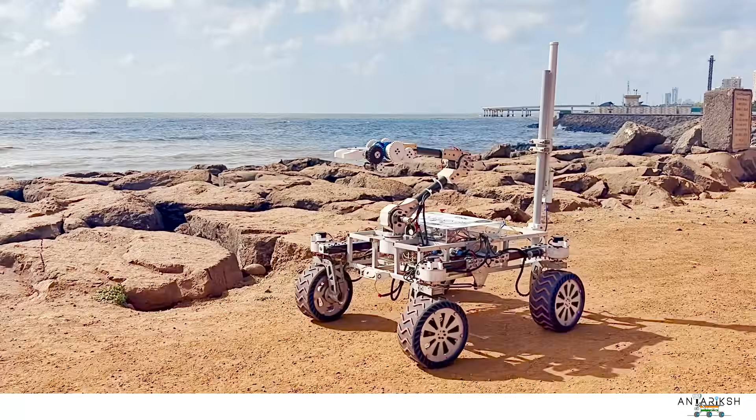Hello, I'm Dantani, the captain of team DJS Antariksh, the official Martian rover team of Dwarkadas J. Sanghvi College of Engineering, Mumbai, India. This year, we are thrilled to participate in the European Rover Challenge 2026 with our rover Avyaan. Our team was founded in 2019 with the motto to decipher unimaginable. Today, we bring together 60 passionate students across 5 key departments: mechanical, electronics, coding, science, and marketing and management.

Our team follows a vertical hierarchical structure wherein the team captain provides strategic direction, guiding the team towards its goal. The vice captains and the team managers support coordination by managing timelines and overseeing administrative processes. The integrations head manages inventory and facilitates interdepartmental coordination. Each department is led by the department heads whose expertise in the domain ensures subsystem development.

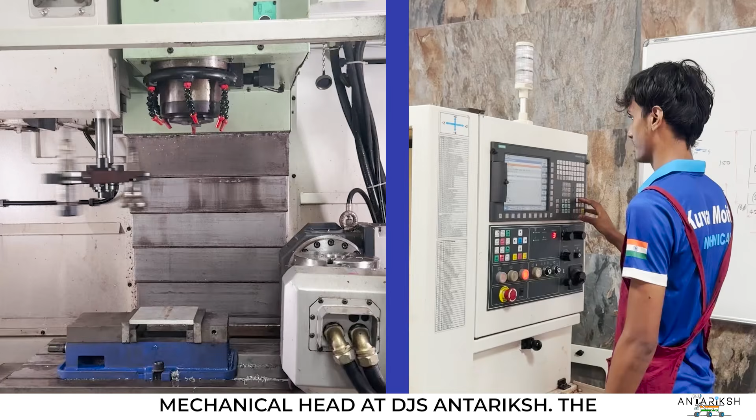Hello, I am Palash Dhabalia, the mechanical head at DJS Antariksh. The mechanical department handles designing, manufacturing and assembly of the rover with a focus on developing components which work efficiently under varied terrains. I am Ishan Amdekar, one of the electronics heads of Team DJS Antariksh. The electronics department oversees power distribution across subsystems, processes collected data from the sensors and ensures reliable communication between the rover and the base station.

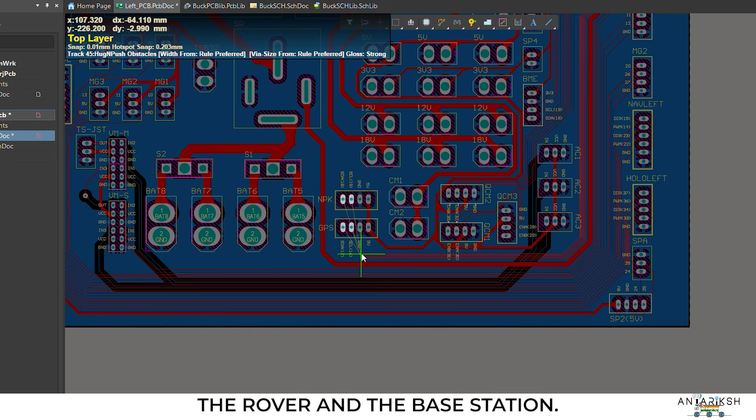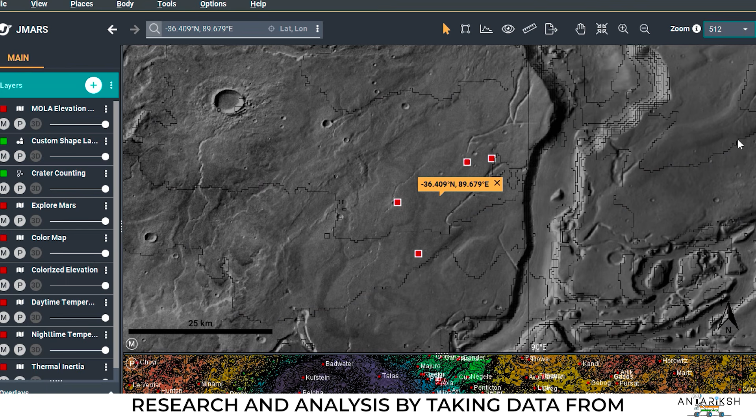I am Harsh Vasa, the coding head of our team. The coding department manages the complete software stack of the rover and oversees the development and implementation of its autonomous navigation and robotic arm operations. I am Shreya Dalvi, the science head of DJS Antariksh. The science department leads research and analysis by taking data from exploration, astrobiology and sampling and converting it into useful insights that support the mission objectives.

I am Shan Upadhyay, one of the marketing and management heads, responsible for securing resources for supporting our project and also overseeing allocation of funds and logistics. We also lead the team's branding by managing our social media and participating in outreach programs.

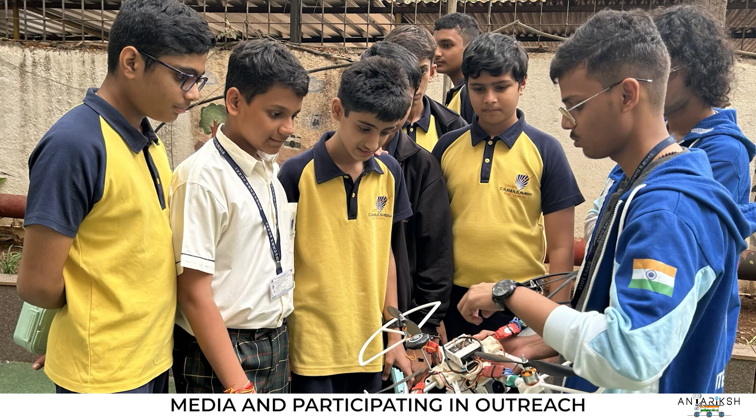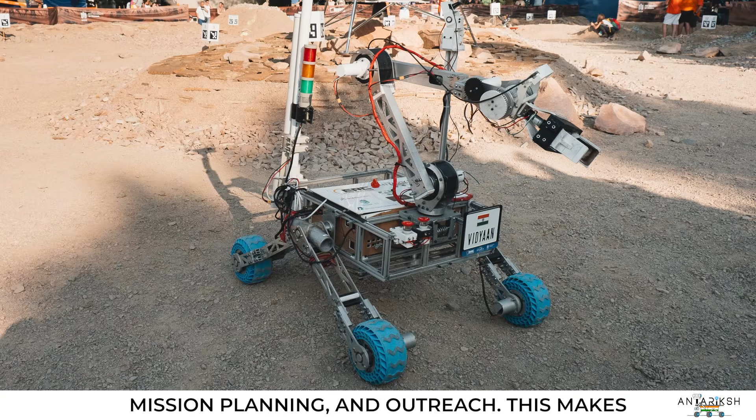Our team DJS Antariksh was founded with the primary aim of competing in the European Rover Challenge. Over time, we have successfully qualified and competed internationally, gaining experience through every iteration. The ERC is a leading Martian rover competition where teams are evaluated not just on rover performance, but also on documentation, mission planning, and outreach. This makes it a multidisciplinary effort where every department plays a key role in the final outcome.

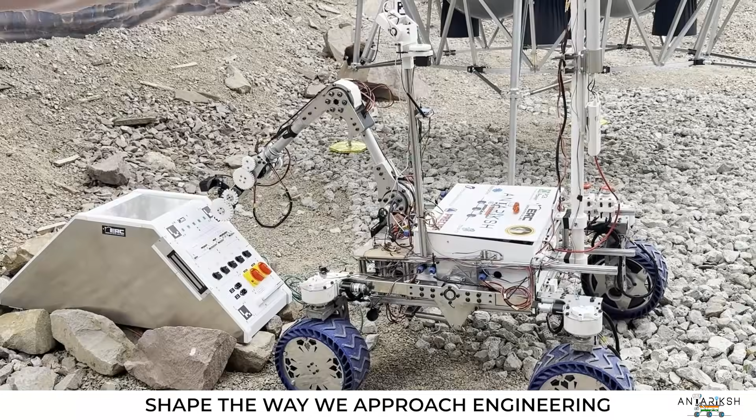For us, the ERC is where everything started, and it continues to shape the way we approach engineering problems through iterative design, testing, and constant refinement. Every year brings with it new challenges, pushing us to rethink and improve our systems, making it a crucial part of our growth as a team.

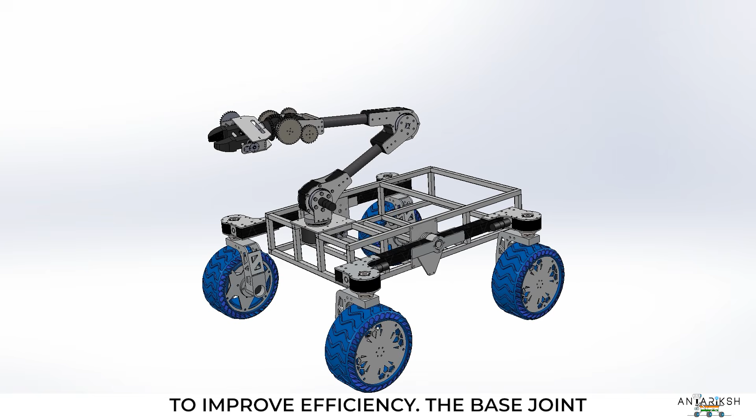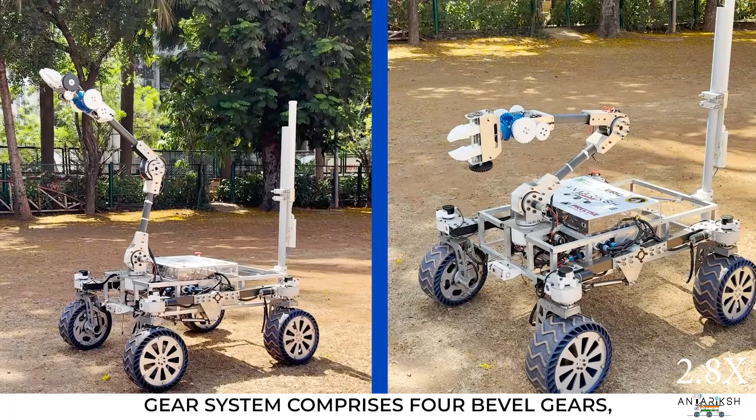The mechanical department has redesigned the robotic arm to a 5DOF configuration, eliminating the redundant 4th joint from the previous iteration to improve efficiency. The base joint employs a worm gear assembly, while the first and second revolute joints utilize inverted cycloidal gearboxes to minimize backlash and improve accuracy. The bevel gear system comprises 4 bevel gears, enabling a compact arrangement, while herringbone gears are incorporated to mitigate misalignment.

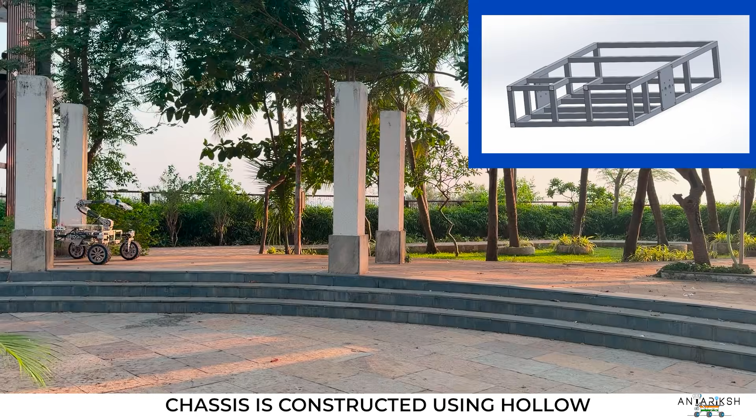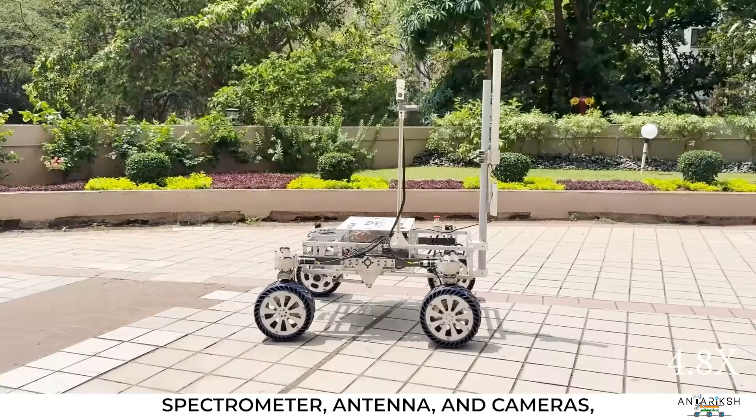A new robotic arm has been developed with a 5DOF configuration, incorporating high-precision servo motors that are directly coupled to each joint, providing smoother motion suitable for autonomous operation. The structure is 3D printed using ABS, while carbon fiber tubes are integrated to enhance strength. The chassis is constructed using hollow aluminium square pipes, replacing the V-slot aluminium extrusion profiles to reduce weight and improve durability. It houses all onboard subsystems including the robotic arm, collection mechanism, spectrometer, antenna and cameras, ensuring efficient operation.

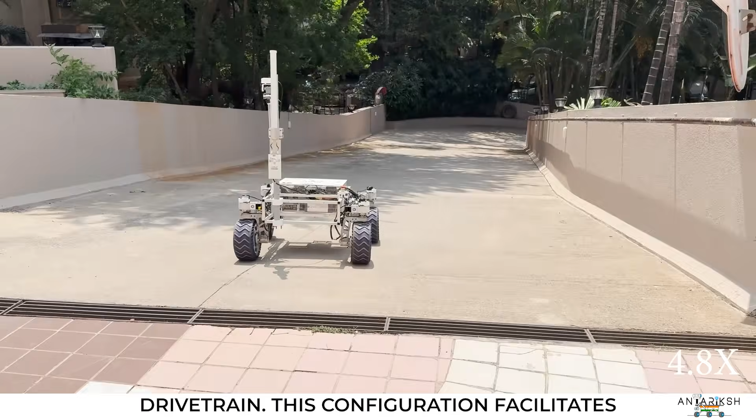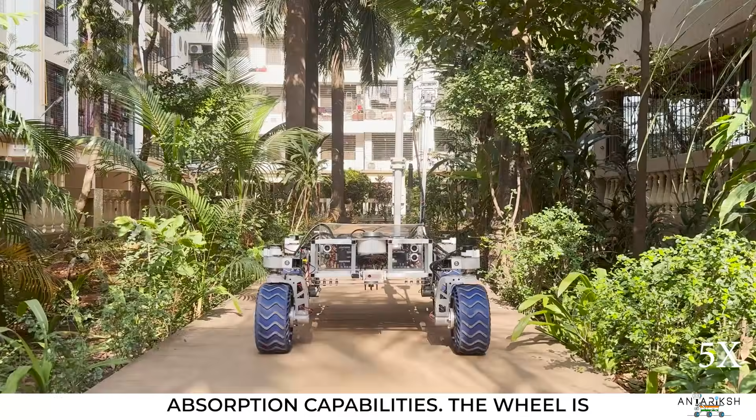A double rocker suspension system with a 4-wheel independent steering mechanism has been developed, incorporating a worm gear drivetrain. This configuration facilitates advanced maneuvers such as double Ackermann steering, crabbing and spot turning while maintaining a ground clearance of 300 mm and enabling the rover to climb inclines of up to 60 degrees. The wheels retain their previous design with a wave-serrated tread pattern, enhancing traction on loose soil surfaces, while a thunderstrip pattern provides effective shock absorption capabilities. The wheel is manufactured using TPU through FDM to enhance flexibility.

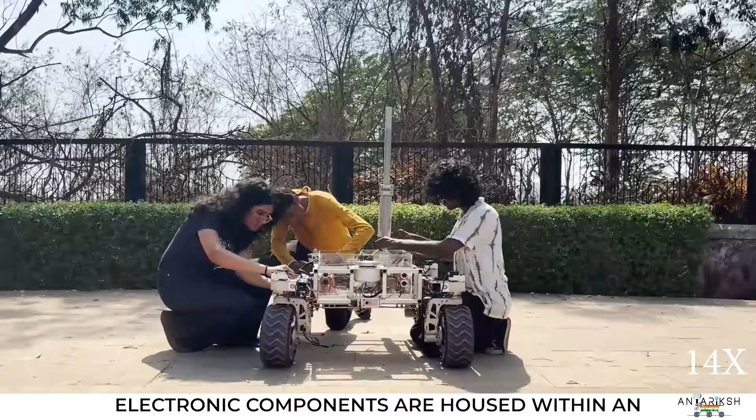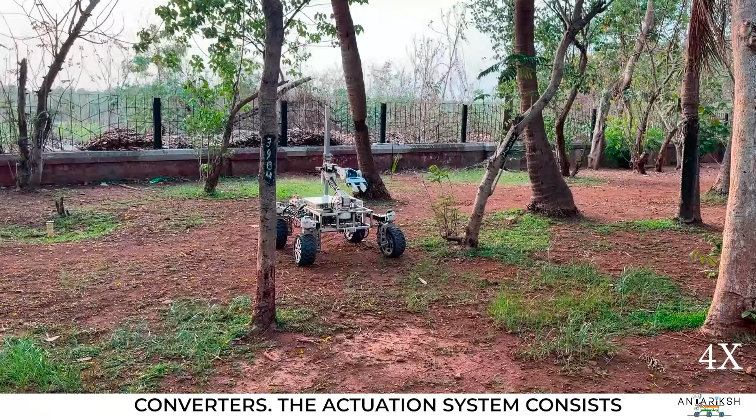The electronics department oversees the telemetry, data acquisition, actuation, and power distribution of the rover. All electronic components are housed within an acrylic enclosure, providing protection from harsh environmental factors. The rover is powered by 6 24-volt LiPo batteries connected in parallel, with power distributed to custom-designed PCBs featuring DC-to-DC buck converters. The actuation system consists of navigation, a robotic arm, and collection mechanism.

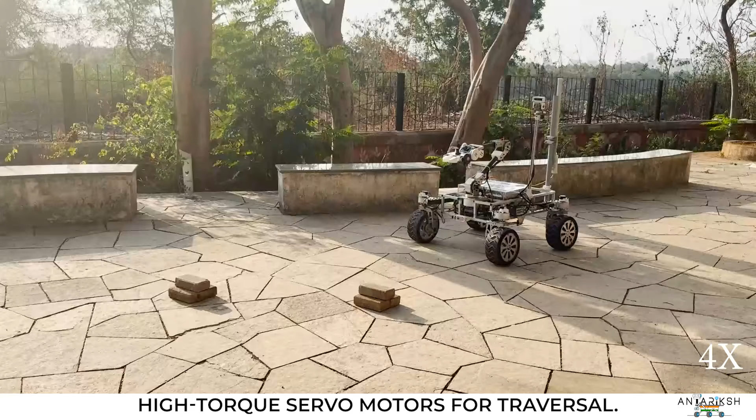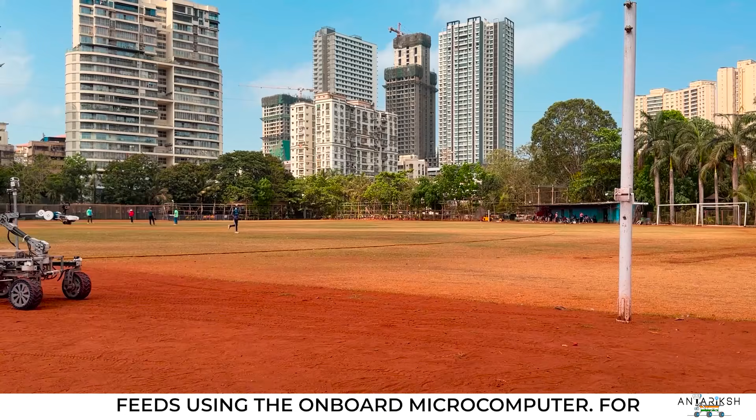The navigation system incorporates BLDC motors for independent steering, along with high-torque servo motors for traversing. The arm and collection mechanism also use servo motors, all equipped with rotary encoders to provide precise feedback. The data acquisition subsystem processes inputs from sensors along with camera feeds using the onboard microcomputer. For safety, a dual kill switch system is implemented where the main switch halts all rover operations, while the secondary switch disables only actuation while maintaining communication and onboard processing.

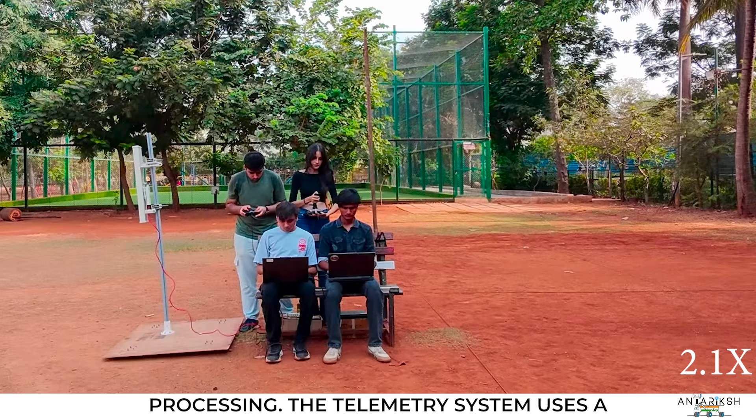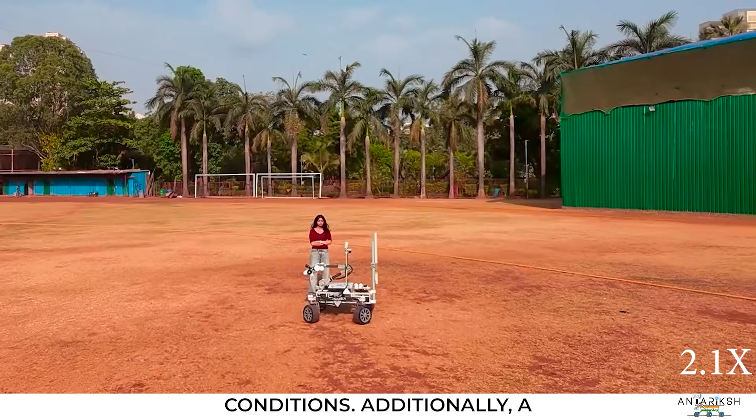The telemetry system uses a 13 dBi omnidirectional antenna on the rover and a 19 dBi sector antenna at the base station, communicating via Rocket M5 modules over the 5 GHz band to ensure stable communication even in non-line of sight conditions. Additionally, a 5.8 GHz high band operating on the TS835 module will be used for analog video transmission in case of failure in primary camera feed.

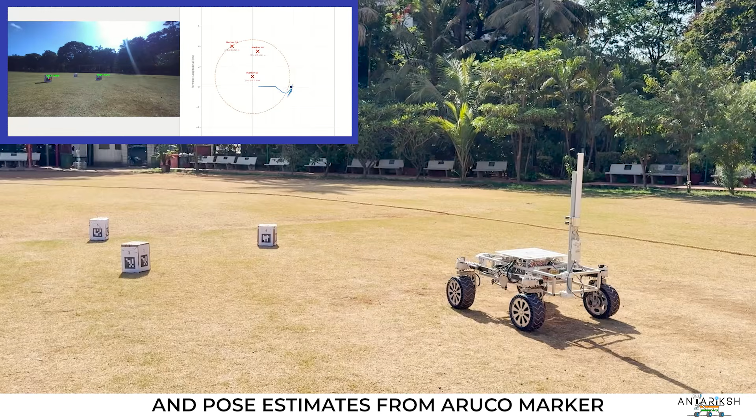For manual operations this year, all onboard camera feeds are handled using a GStreamer-based pipeline, reducing CPU usage and bandwidth consumption. For autonomous navigation, the ZED 2i camera is used to generate a 3D point cloud, which is then converted into local and global costmaps. For localization, various inputs including visual odometry from RTAB-Map, wheel odometry, IMU data, and pose estimates from ArUco marker detection are fused using an unscented Kalman filter to obtain the rover's pose estimate.

The cost map and the pose estimates are used by the Nav2 stack for path planning and execution, where Theta* acts as the global planner and regulated pure pursuit acts as a local controller. Behavior trees are used to ensure smooth execution and recovery. The autonomous stack has been tested in simulation to validate the algorithms and ensure reliable operation.

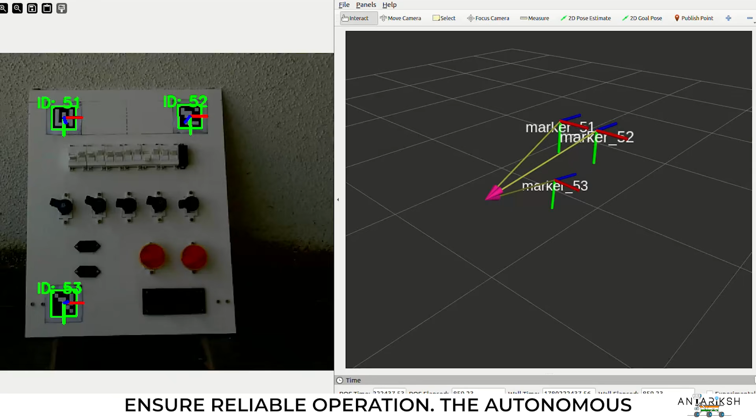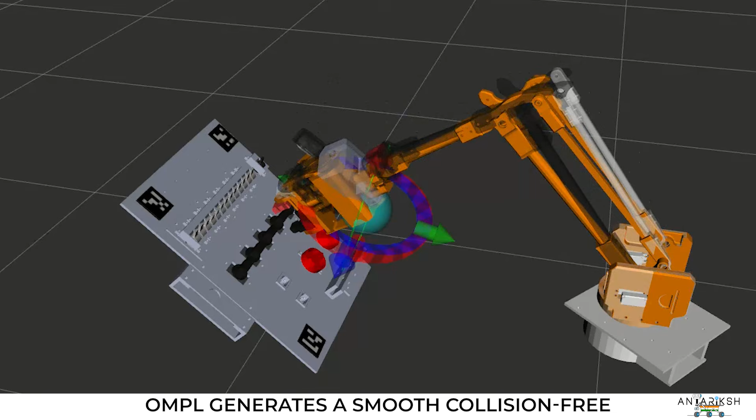The autonomous operation of the robotic arm utilizes ArUco marker detection to estimate the panel pose, alongside a YOLO-based object detection model used to identify the elements of the panel. Based on this and the current arm position, the target pose is determined. MoveIt 2 then handles motion planning and execution, where IKFast computes the joint configuration and OMPL generates a smooth, collision-free path. A diffusion-based vision language action model takes the task instructions, visual input, and arm's joint state to follow task instructions and operate on the panel.

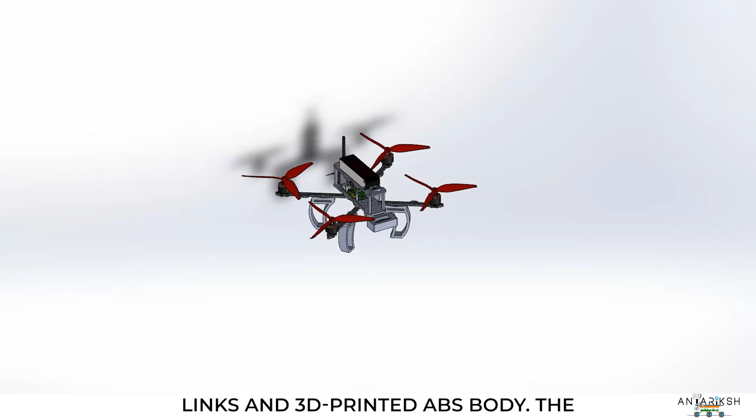The drone is a 10-inch hybrid X-frame quadcopter built using carbon fiber arm links and a 3D printed ABS body. The onboard electronic components are mounted on custom designed supports to maintain proper weight distribution and to reduce aerodynamic drag. The system is powered by a 4S 6200 mAh LiPo battery supported by a capacitor to reduce voltage spikes and an integrated BEC to provide stable power to the onboard electronics.

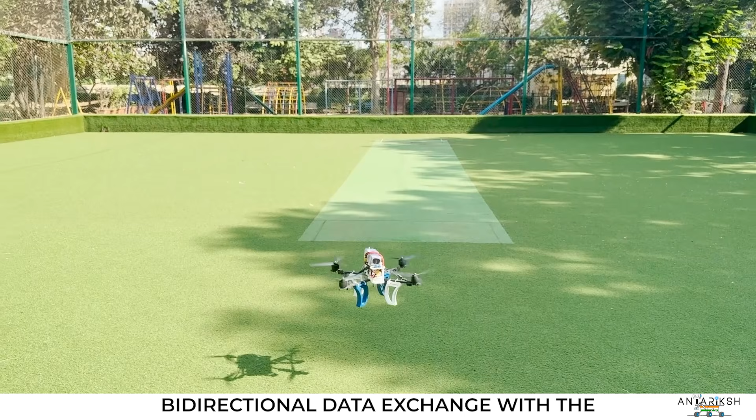The avionics system is based on the SpeedyBee flight controller integrated with GPS and optical flow sensor for accurate navigation. A Raspberry Pi 4 Model B is used for onboard processing and higher level operation. The drone utilizes a 2.4 GHz communication link for flight control and a 433 MHz telemetry link for MAVLink based communication, enabling reliable bidirectional data exchange with the ground station.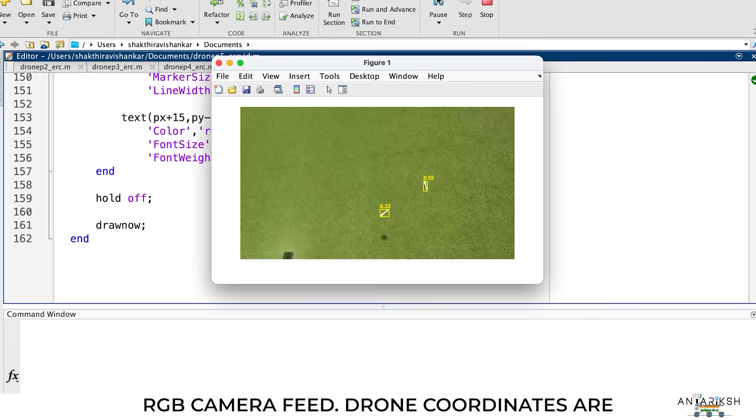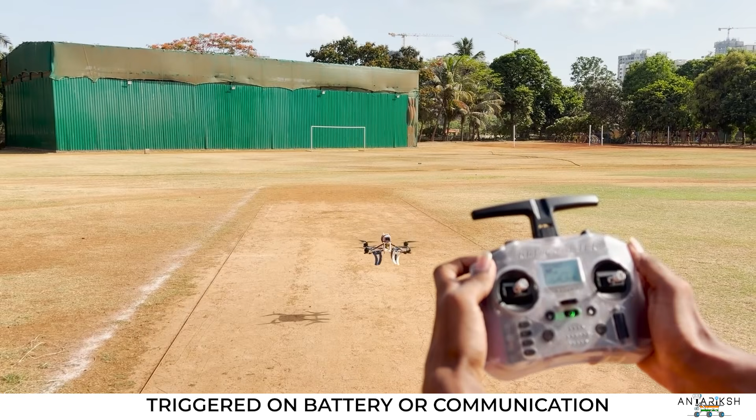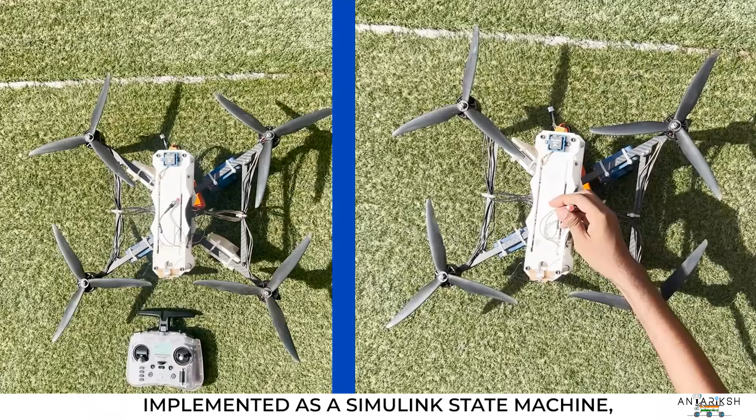For autonomy, probe detection is performed using the YOLOv8n model on the monocular RGB camera feed. Drone coordinates are estimated in MATLAB using the camera's field of view and altitude. Landing is guided by ArUco-based pose estimation with positional corrections sent over MAVLink, and an auto-land is triggered on battery or communication failure. A manual override on the RC controller allows the operator to instantly switch to manual mode. The overall mission logic is implemented as a state machine, handling takeoff, detection, and landing.

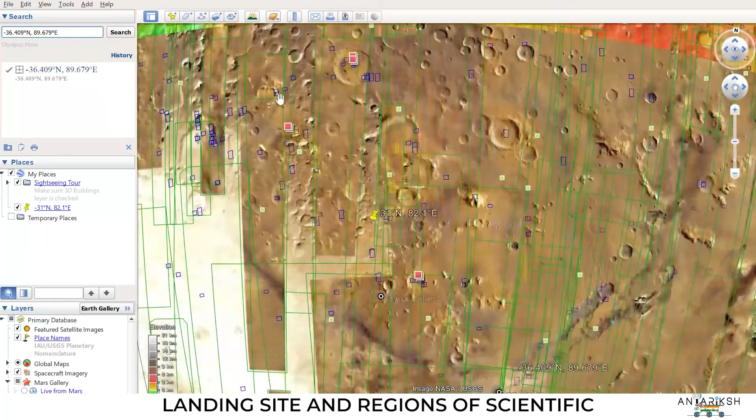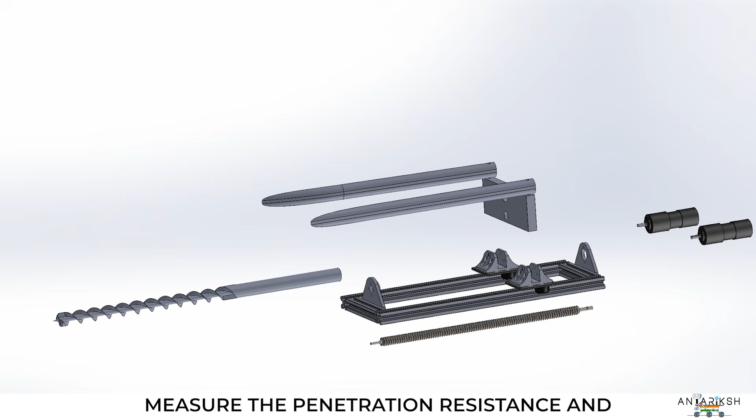The science department uses tools like JMARS and Google Earth Pro to analyze Hellas Planitia, identifying a suitable landing site and regions of scientific interest. Based on the Marsyard, a falsifiable hypothesis is formulated, which is validated using an auger penetrometer that is being developed to measure the penetration resistance and auger index, enabling subsurface stratigraphy mapping, while a custom-built Raman spectrometer with a Czerny-Turner configuration helps in analyzing soil composition.

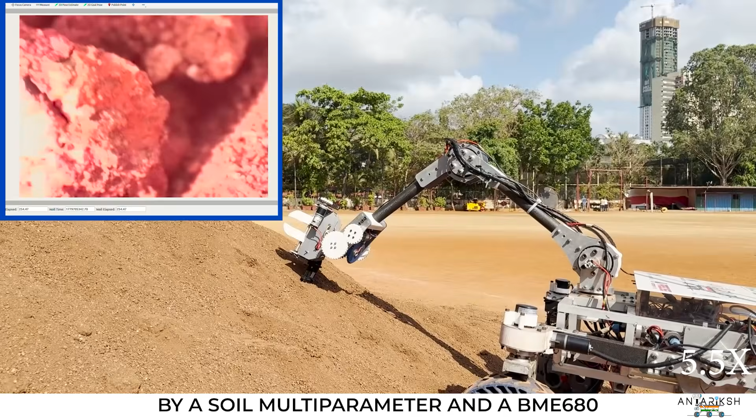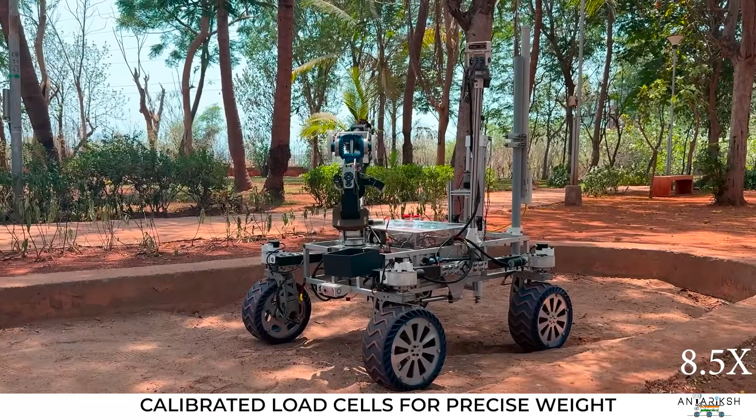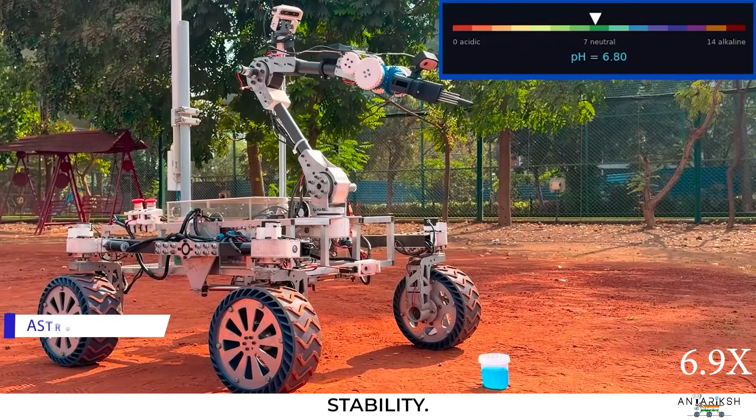A digital microscope captures high-resolution terrain imagery supported by a soil multiparameter sensor and a BME680 sensor for subsurface and atmospheric monitoring. For sampling, a scoop and deflector will be used to collect regolith and rock samples, each deposited into separate containers equipped with calibrated load cells for precise weight measurement, while a third container will store subsurface samples extracted beyond 30 cm by a centrally placed aluminum auger driven by a high-torque motor and reinforced with support rods for stability. For astrobiology, a pH sensor on the end effector measures the sample's pH, while a peristaltic pump transfers it into a sealed container with a one-way valve preventing contamination and leakage.

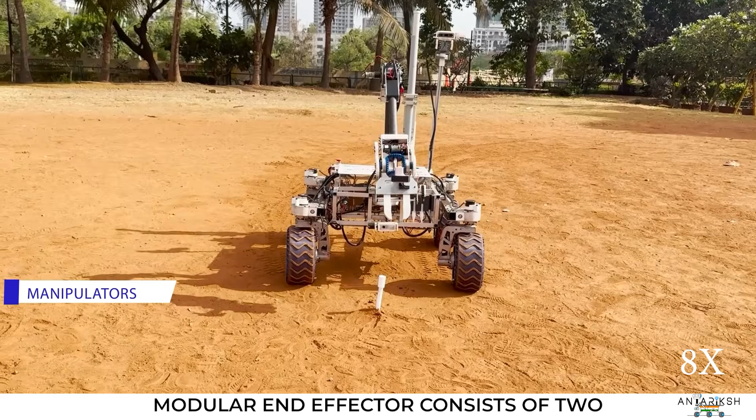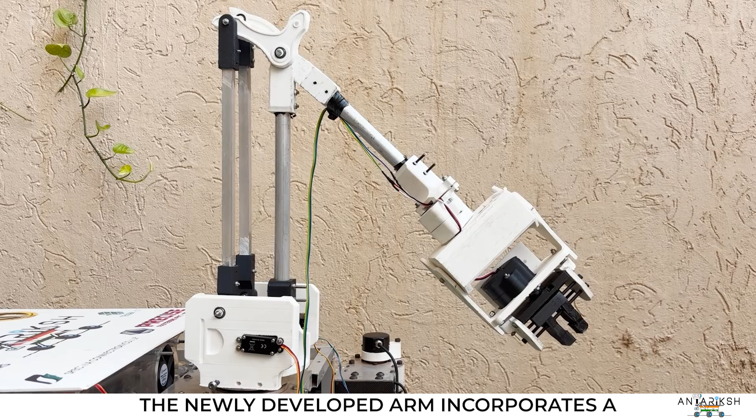The modular end effector consists of two moving fingers with tapered ends actuated using a lead screw mechanism, while a guide rod has been integrated to provide additional stability. Designed for autonomous operations, the end effector of the newly developed arm incorporates a rack and pinion mechanism driven by a Waveshare motor. The fingers have a serrated design, enabling it to operate on switches, locks and plugs for the maintenance task.